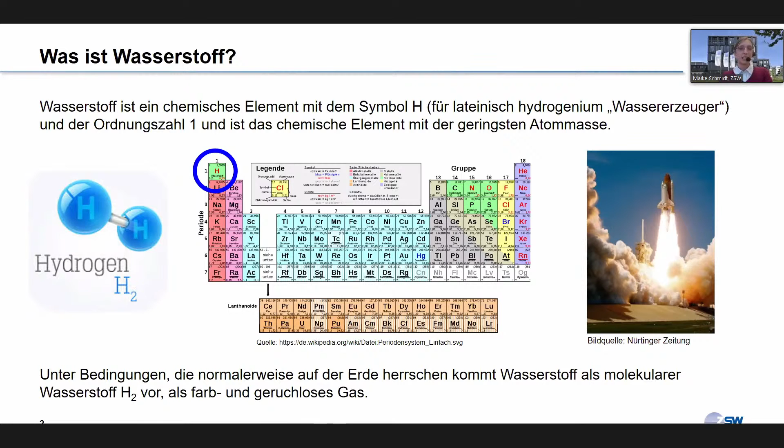Hydrogen is a colorless and also odorless gas, and usually this is the way it is being found on this planet. When you think of hydrogen, you might also think of the picture on the right-hand side. You might know that it is used as rocket fuel, but all the other applications of hydrogen today might be less known to you. And this is what we would like to take a look at now, because hydrogen already plays an important part of our economy today.

We have a global consumption of approximately 70 million tons, which amounts to 140 billion euros if you apply 2 euros per kilogram hydrogen, which is

Ms. Schmidt, unfortunately I have to interrupt you. Could you turn the microphone a little bit away from your mouth? Okay. Thank you. I will start again.

So the 140 billion euros per year is approximately the value that is attributed to hydrogen when we assume that 1 kilogram of hydrogen costs approximately 2 euros. This is correct if you produce hydrogen based on natural gas, and the current price spikes that we see in Europe at the moment are not yet included here. The energy demand needed to produce this hydrogen corresponds to approximately 1.4% of the world's energy demand, so it's quite a lot. But where is this hydrogen being used?

65% of the global hydrogen demand comes from the chemical industry, and the ammonia production is the main consumer, predominantly for fertilizer production, but also in the production of polymers, so plastics, we need hydrogen, also for resins and others. And another quarter, or 25% of the global hydrogen demand, comes from refineries. Here crude oil, via hydrocracking and hydrotreating, is transformed into the products that you can buy at the gas station or that are delivered by heating oil suppliers.

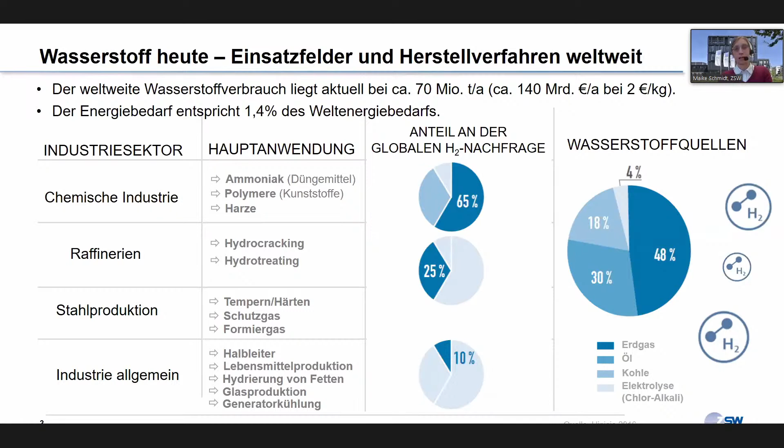Today, hydrogen is usually produced based on fossil fuels. A lot comes from the reforming of natural gas and also oil and coal, and a remaining part comes from electrolysis or chloralkali. But this is not yet really green hydrogen that is being produced here. So this shows already that we are faced with huge challenges if we want to make hydrogen climate neutral.

Let's take a look at Germany. Here, the distribution is a little bit different. In Germany, we have a hydrogen consumption of approximately 1.6 million tons per year, and 40% of it goes to the refineries for the refining of mineral oils, as we've seen at the global scale as well. And 25% in Germany goes to ammonia production, which means the chemical industry, and 20% to the methanol industry, so once again the chemical industry. So the distribution is similar to the international level; however, the figures slightly vary.

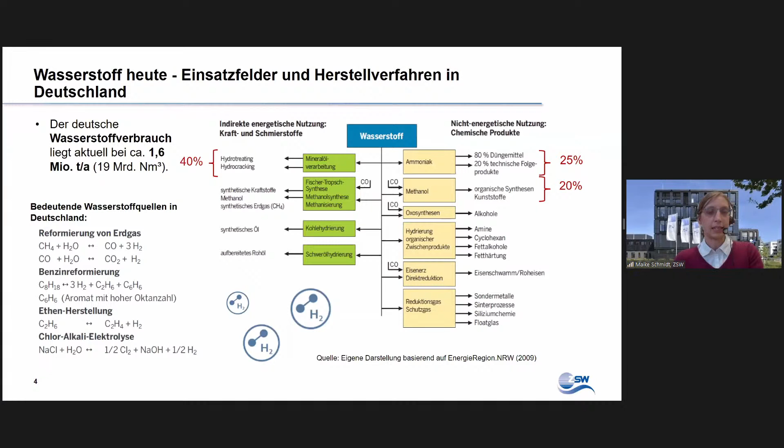In Germany, the main part of the hydrogen comes from the reforming of natural gas, and you can see the chemical reaction on the left-hand side, and you can also see that it emits CO2, so carbon dioxide. We also have petrol reforming, where we also emit carbon dioxide, ethene production, where we have hydrogen as a byproduct, and also the chloralkali electrolysis. And here you can see the main building blocks of hydrogen, which are fossil in nature.

And if we take a look at the international level, we see that hydrogen as a raw material for industry makes a huge contribution to greenhouse gas emissions today. You can see here the global hydrogen production, with 830 million tons per year in 2017, led to larger carbon dioxide emissions than Germany with 797 tons. So this creates a huge challenge if we want to have climate neutral processing here.

Now I will take a look at the infrastructures in connection with hydrogen. We have different product pipelines for hydrogen that are in operation. Here we have, for example, the pipeline in the Ruhrgebiet, which has existed since 1940 and has a length of approximately 230 kilometers, but it's a product pipeline to transport the product hydrogen, not like natural gas as an energy carrier in the large transport pipelines over huge distances.

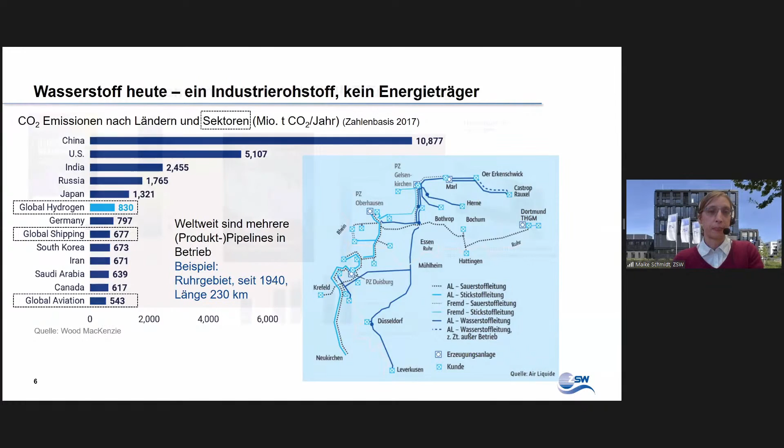This is not yet available for hydrogen. How about the future? In the future, we do not only want to use hydrogen as a raw material for the industry, but also as an energy carrier. And you can see here in these two schematic roadmaps, the Hydrogen Roadmap Europe on the left-hand side, and in the middle, the Roadmap to a US Hydrogen Economy from the US.

And you can see here that the expectations are that not even in an ambitious scenario is a lot going to happen by 2030. But if you take a look at 2015, we see 325 terawatt hours of hydrogen in the existing industry. And in the year 2030, we have 665. So it's a doubling, and till 2050, we are headed towards 2,251. And of course, the areas where the hydrogen is being used are very important here.

First of all, as a new raw material in the industry, then as an energy carrier in the industry for heating and also electricity generation or heating of buildings, then in transportation, and also for electricity generation and storage. This is what the European strategy envisions for 2050. Till 2030, the largest part should lie in the field of energy production, but also in transportation and renewable energy supply. We also want to see a development in this ambitious part here.

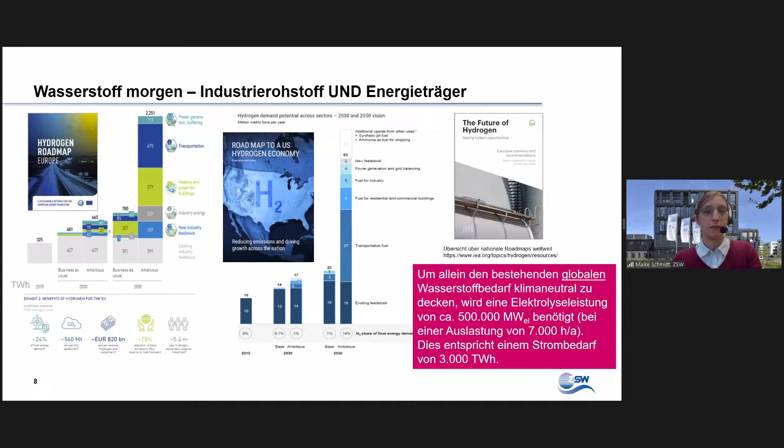If we take a look at the European hydrogen strategy and the US strategy, then we get an idea of what this means in terms of building up a renewable network if we want to implement these kinds of scenarios. Of course, we are not alone in Europe when it comes to the strategy. The American hydrogen strategy has already been mentioned, but there are also Asian hydrogen strategies. Japan and Korea were the first ones to set up and publish hydrogen strategies, but also Australia and South American countries like Chile and Brazil are very active in this hydrogen context.

And many European countries are very active, but we can also see that today's mineral oil exporting countries like Saudi Arabia and South Africa also see some opportunities in the field of hydrogen, as a future export product for those who have sufficient potential, or also for their own energy consumption. And this leads to an intensive international innovation competition, which Europe would like to decide in favor of Europe. But of course, this means that Europe has to make a huge effort.

I just said that we want climate-friendly hydrogen, and of course, there's a huge debate about what it actually means to have climate-friendly hydrogen. This is why I brought along the color coding of hydrogen, just to give you a rough overview of what we are talking about with the individual types of hydrogen. So green hydrogen is hydrogen that is generated via renewable energies, via electrolysis or biomass. Sometimes people also mention biomethane. Some say that this is orange hydrogen. I kept it in green here in order to avoid too many colors.

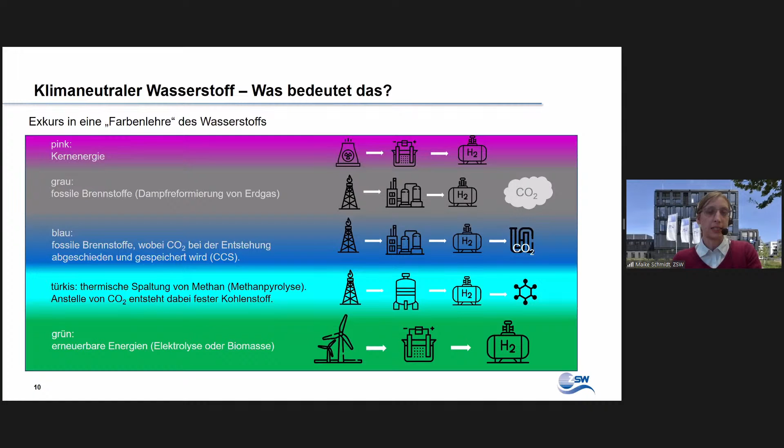The gray hydrogen is the one that we produce today based on fossil fuels, and the pink, or some also call it red hydrogen, is the one that stems from electrolysis, but the electricity source is nuclear power. In particular, in France, this is a concept that is being favored, and also in Hungary, they think about this concept. So this means that within Europe, we have a concept which can actually be discussed when it comes to climate neutral hydrogen.

Now we have the climate neutral hydrogen, which cannot decarbonize all different areas alone. This is why we also talk about hydrogen and the synthetic follow-up products. And this is just an overview of the synthetic products that we can talk about. Here you can see in the upper part the production of hydrogen by electrolysis. And then, of course, you need a carbon source, which is carbon dioxide in this case, which via different processes can be used in order to create the different products.

Either you can use it as a synthesis gas, and via Fischer-Tropsch catalysis, you can turn it into different products so that you have a synthetic derivative, which is similar to crude oil, but climate neutral and can be further processed in refineries, for example, like crude oil today, to kerosene, gasoline, or others.

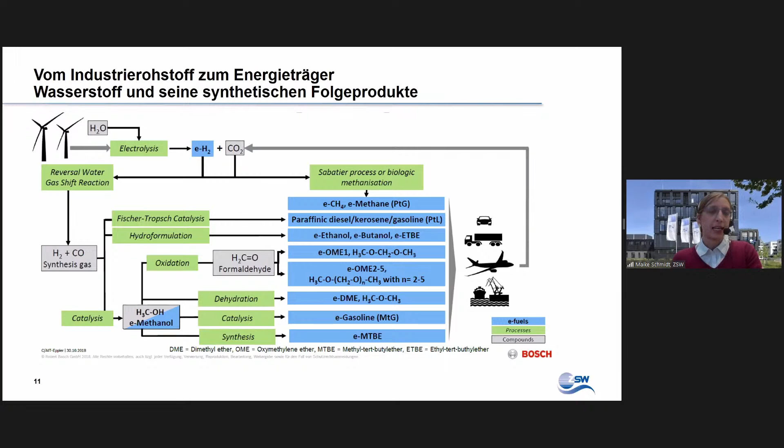But you can also use a different kind of process and go via methanol, and via methanol, you can turn it into different derivatives and produce different chemical basic materials and turn it into gasoline, for example, or other products that can be used as synthetic fuel. So these are actually the synthetic products that are being synthesized in these processes.

So now, once again, the question, why do we intensively talk about hydrogen? And I think the key word here is climate neutrality. And what does climate neutrality actually mean? In Germany, we have our climate scenario and also the climate targets that were laid out in 2010 already. So by 2050, we want to reduce our greenhouse gas emissions by 80%.

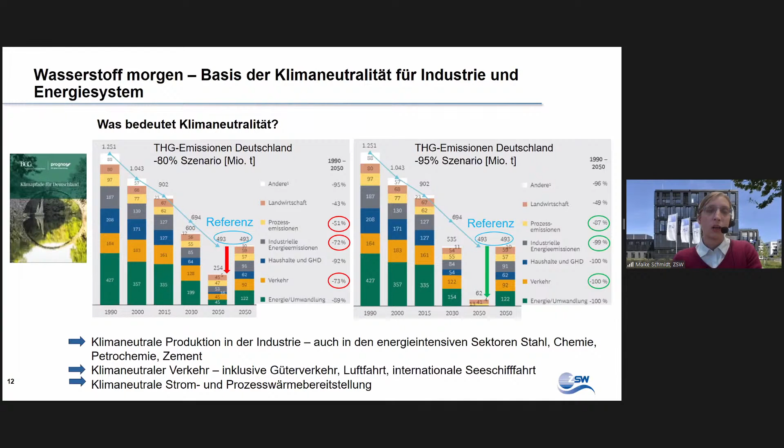And so far, climate neutrality is actually the key why we have to debate hydrogen so intensively and why we will see more hydrogen in the future. And it will be more than just a raw material, but also play a very important role in our energy system. So now it's up to you, and please let's have your questions.

Thank you so far, and thank you also for the last slide. Hydrogen is the game changer for climate neutrality, and that's why we are talking about it in this introduction as well. And I also took on board that we need a lot of electricity for green hydrogen production, and so electrolysis. And I noted 3,000 terawatt hours for the industry alone. That's the electricity consumption in Europe. So we have to build a lot of solar installations and make a lot of savings as well to make it work.

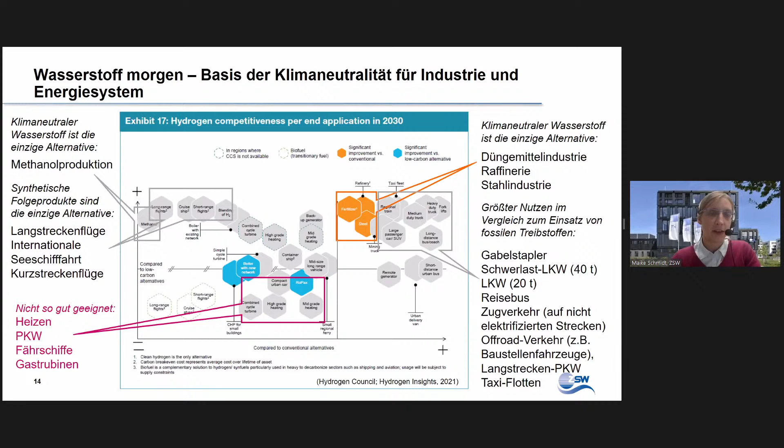The area of heating is not so well suited, so low temperature heat, and also the area of passenger cars and ferries are not that well suited. And gas turbines, yes, if you use them or need them as a backup technology, but not primarily as an application for hydrogen. This is actually what the Hydrogen Council recommends or says.

Let's take a look at the industry. Climate protection and hydrogen applications in industry. Here there are three examples: ThyssenKrupp in Duisburg, who emit 8.3 million tons of carbon dioxide at their location. BASF in Ludwigshafen, that produces 6.6 million tons of carbon dioxide, and the refinery in Karlsruhe that creates 2.7 million tons carbon dioxide. So these are figures from 2018, but I'm assuming that they're still representative.

So with these examples, you can see that the industry actually has a huge share in the carbon dioxide emissions in our country. And here we see chemical industry 2%, iron and steel 4%, refineries 3%. So this means that if we would use new technologies here like hydrogen, and if we made huge progress here, then of course we would also be able to very quickly cut the carbon dioxide emissions in these sectors and go further into the direction of climate neutrality in these sectors.

This is very important because these segments have long lifespans when it comes to their plants, in particular when it comes to blast furnaces, steam crackers, or cement kilns. They have a very long lifespan of sometimes 50 years or more, and have a high capital need, capex need at the beginning. So this is why it's so important, if additional investments are being made, that they are invested in climate neutral technologies, because otherwise we will not be able to become climate neutral in these sectors by 2050.

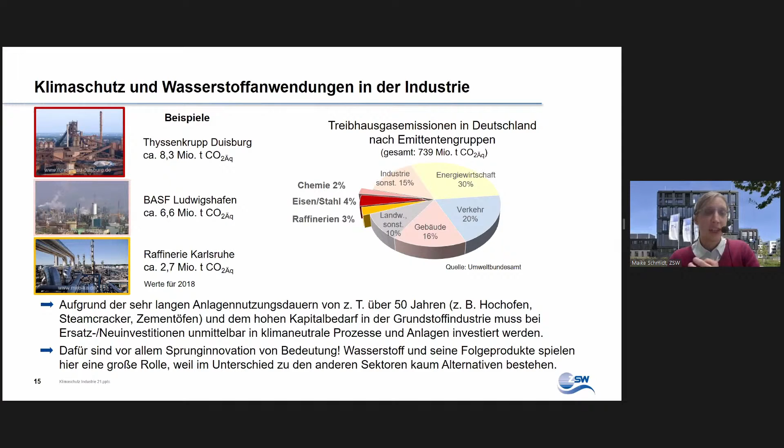This is why they also need to have hydrogen available in order to be able to transform and take these transformative steps. This is why we also need these important innovations called leap innovations, where we use completely new processes like hydrogen, and hydrogen plays a very important role here because in comparison to the other sectors, we have only few alternatives for the industry.

Let's take a closer look at the situation. Here we have a kiln. Usually nowadays, coal is used, or coke is used to reduce the iron ore. And we also see process-related carbon dioxide emissions. And in the alternative, the direct reduction, we can use green hydrogen. And in the end, we have iron and water. So this means that the carbon dioxide emissions within the process can be reduced by approximately 97%.

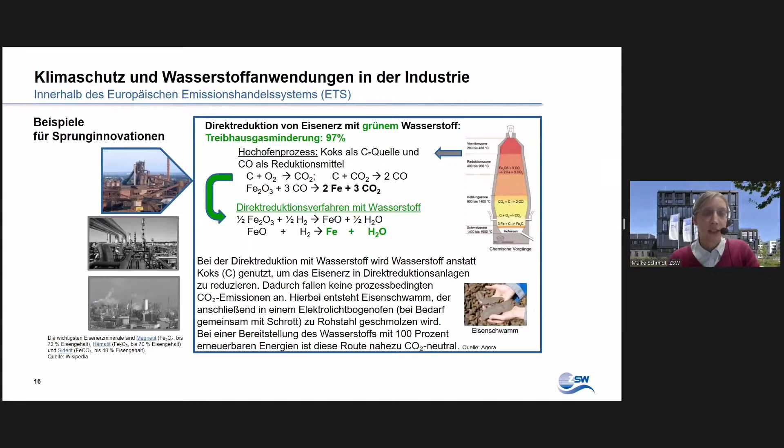So in the end of this process, of course, you still need a little bit of carbon in order to guarantee the quality of the product. This is why you cannot become 100% climate neutral, but a reduction by 97% is quite a remarkable step, and a good step into the right direction towards a climate neutral production. This has already been tested. You might already have seen this in the media.

So the Salzgitter AG is already testing the respective electrolyzers. And here we have the 2.2 megawatt PEM electrolyzer. And Siemens was commissioned with the building of it, but you can already assess that 2.2 megawatt is actually a pilot plant, and they simply want to check whether the technology is working before they start with large-scale processes. But it's going to be without any alternatives if we want to continue to produce steel in Germany. And I think the stakeholders know that.

Another example is the so-called MIRO concept, the Mineral Oil Upper Rhine refinery. And their objective is to become climate neutral as a refinery. On the left-hand side, you can see the situation today. So there's crude oil being transported, and at the MIRO in Karlsruhe, it is being refined and turned into the respective products, is then being used, and in the consumption or utilization, carbon dioxide is being emitted.

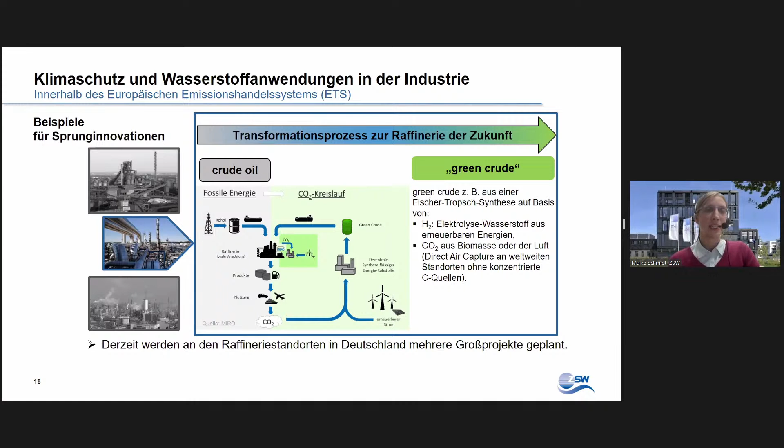And the Miro, of course, is not the only refinery. There are different refineries and different locations where we see similar activities ongoing. And maybe one or the other of you has read in the media an article about the location Werlte and the first synthetic kerosene. So here we can already assess that first steps into this direction are being taken.

Then, of course, we have the transportation sector, where hydrogen might be used as a key technology in order to become climate neutral. We already touched upon passenger cars, and I think that the respective development in terms of batteries and the battery electric vehicles are well ahead of the fuel cell producers, but still there are some use cases where fuel cells are actually of good use.

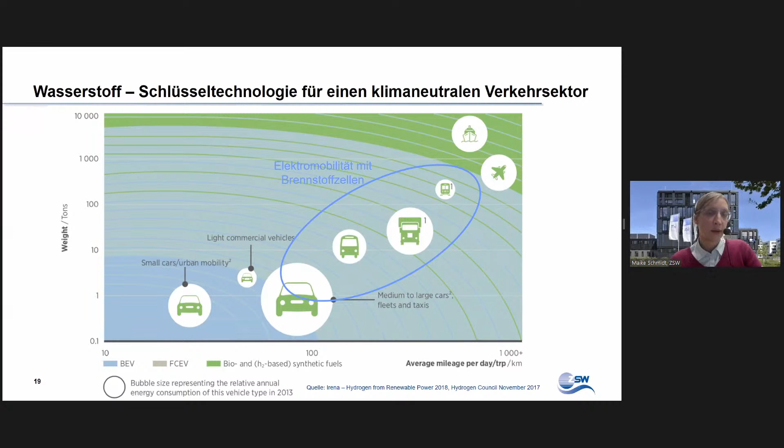For example, trucks, coaches, or also trains, as I've already mentioned in the first half of this seminar. And then, of course, the synthetic subsequent products for air traffic and also international maritime transport.

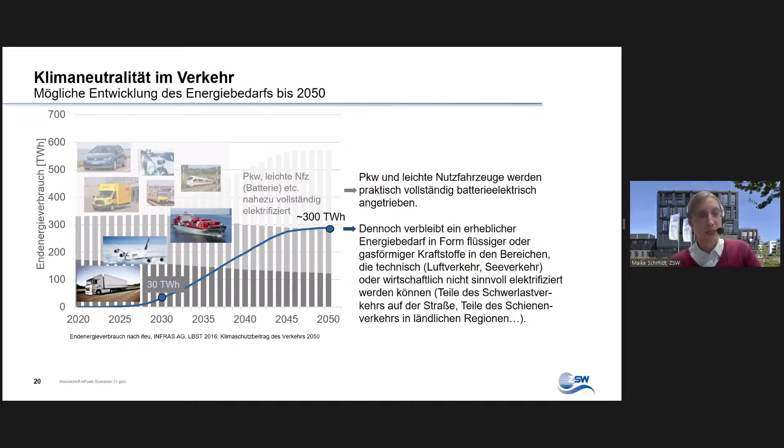Let's take a look at the question how much it will be in the end. So here we have a graphic how the end energy demand might be in the year 2050. And it will be approximately at the level of 600 terawatt hours. And we assume that a large part of the passenger cars will be run by electric batteries. So in the end, we will have 300 terawatt hours for the air traffic and also maritime transportation that we would have to cover. So how can it look like?

In the field of fuel cells, there are some developments already, in particular when it comes to forklift trucks or industrial trucks. And there are approximately 12,000 already being used at the moment next to battery electric vehicles, always depending on the respective field of operation. And either we have a fuel cell or battery electric or the conventional forklift.

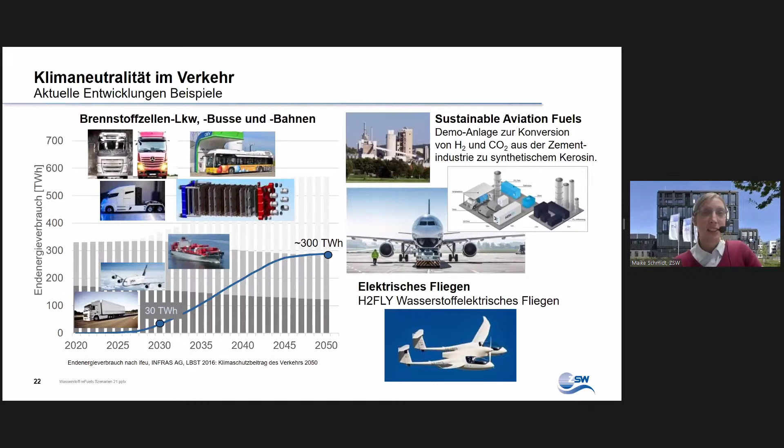But by 2030, and actually also by 2050, we will probably not see long distance airplanes or long distance flights based on hydrogen. The electrolysis that you need for synthetic fuels, of course, can also be made available for hydrogen. So this means that we have fewer efficiency losses. So the investments into hydrogen are actually good and of no regret, so to speak. So tomorrow we'll talk in more detail about the hydrogen strategies at the national level and also in Europe.

The roadmaps stipulate certain targets. In Germany, by the year 2020, we have less than 0.1 gigawatt electrolysis capacity. And by the year 2030, we want to reach 5 gigawatt. Within the EU, we see a similar picture. We have within the EU in 2020 less than 1 gigawatt electrolysis, and by 2030 we would like to reach 40 gigawatt.

And of course, this also involves a certain revenue potential. At the European level, approximately 35 billion euros, in Germany 4.5 billion euros. And on the right-hand side, you can see the development potential.

Of course, a lot of revenue can be generated when you are in the lead in this technological segment. And so far, it's quite clear that Germany and also Europe want to play a leading role in the hydrogen sector because it will generate jobs in the future. However, the main challenges lie in this rapid build-up of the electrolysis capacity, because the electrolysis at the moment is at the manufacturing level between 1 to 10 megawatts per plant.

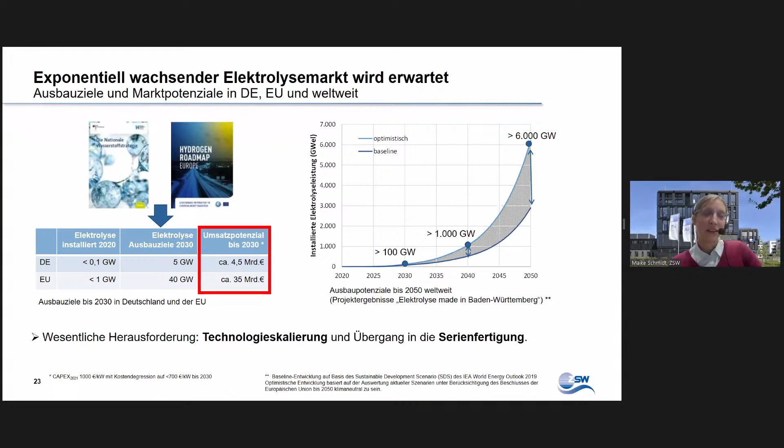This means that we first of all have to scale the technology, and in parallel, simultaneously, we have to come to a series production in order to be able to cater for the envisioned network. And of course, we are not alone. We are in an international competition. And this is why it is quite an exciting environment and sector.

As you can see here, the electrolysis and power-to-X applications, we have successfully demonstrated in practice in a large number of pilot projects that it works, but at the global scale, there are only approximately 10 suppliers of electrolysis plants in the megawatt range. And so this means that in Europe, we have to try to keep up. And we also have to prepare the companies so that they are capable of participating in this market.

In America and also in Asia, there are also producers who want to grow and who want to participate in these markets. And also China has set itself respective targets in its 5-year plan. And by 2030, it wants to install many megawatts or gigawatts of electrolysis capacity. So we do not only see changes in Europe, but also elsewhere.